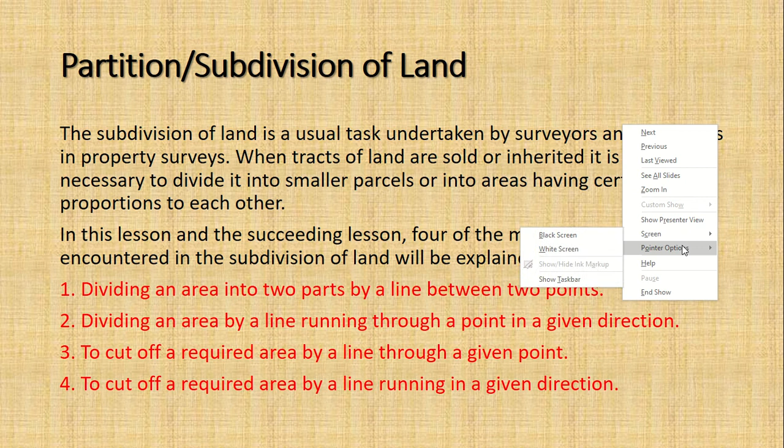So in this lesson, four of the most common cases encountered in subdivision of land will be explained. These are dividing an area into two parts by a line between two points. Kumbaga, meron siyang ituturo na point to point, and yun yung hatian. Usually, mas madali yan, ituturo na lang nila kung saan hahatiin, tsaka doon na natin i-run yung survey, makukuha na natin yung mga bearings and length ng dividing line.

Number 2, dividing ang area by a line running through a point in a given direction. Hindi natin alam kung saan point siya tatama. To cut off a required area by a line through a given point. Meron siyang gustong, kumbaga magbebenta ka ng 1 hektarya, cut off mo yung 1 hektarya from the 10 hectares. Saan yan? Mag-uumpisa sa isang point, given point. Saan yung direction ng line?

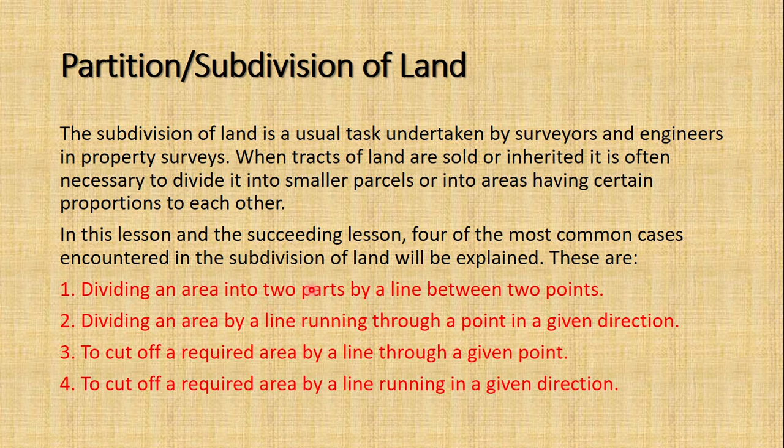Another one is to cut off a required area by a line running in a given direction. So yan yung mga common cases, pero marami pang ibang cases paano mag-subdivide. Meron yung paliko, hindi lang isang linya yung dividing line, kundi merong dalawa, merong tatlo, for example. So those are just cases.

So example, dividing a tract into two parts by a line between 2 points. For example, with 2 points, ito yung C and E, ito yung dividing line. Kanyari, ibebenta itong part na to o yung part na yan. So nandito yung mga adjusted latitude and departure. Of course, before you divide a land, given na itong mga adjusted latitude and departures na bawat line, from previous survey.

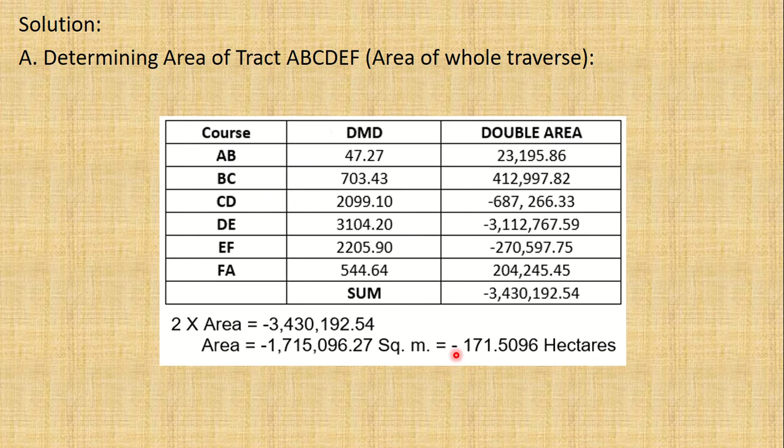So determine the area of tract A, B, C, D, E, F. Na-determine na natin itong area previously by DMD, DPD, and by coordinates also. Tingnan natin, ito yung buong area. Considering tract C, D, E, F, or east of the dividing line, balikan natin, C, D, E, F. So this is east of the dividing line, itong consider natin.

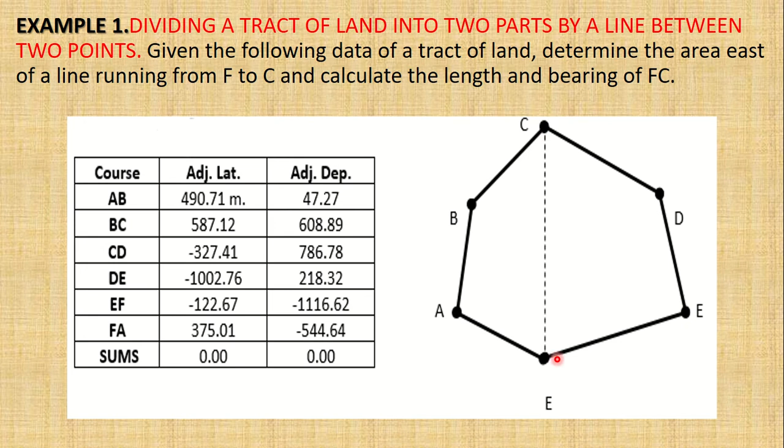So the sum of the latitude should be equal to 0 para mag-close yung line. Diba, so ito yung dividing line. 1452.84 meters ang latitude of line FC. Oh, nagkamali, F, this should be F, kasi meron na tayong E, so this is CF or FC. Ito yung kinukuha natin ang bearing or length. So this is the latitude of the dividing line and departure of the dividing line.

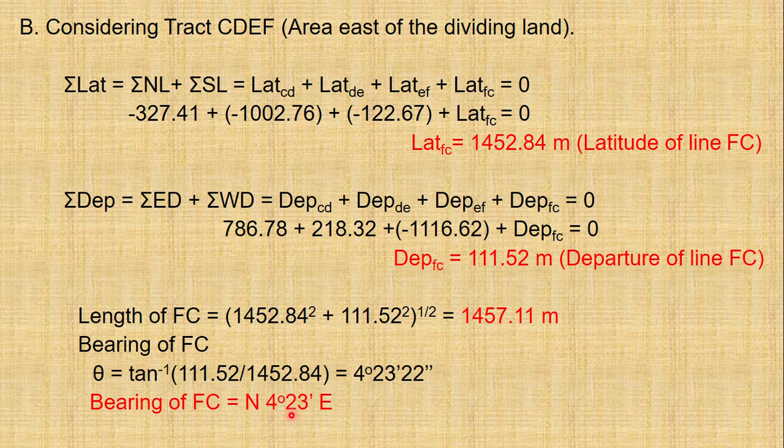So parehas din, kung makikita nyo, parehas din. Ito yung application ng omitted measurements, parehas din yung na-discuss natin previously from omitted measurements. So length of FC is just square root, raised to 1/2, square root of the sum of the squares of the latitude and departure of the line, which is 1457.11 meters. Now bearing of FC is... so this is the bearing now, North 4 degrees 23 minutes east. So that is the bearing of the line.

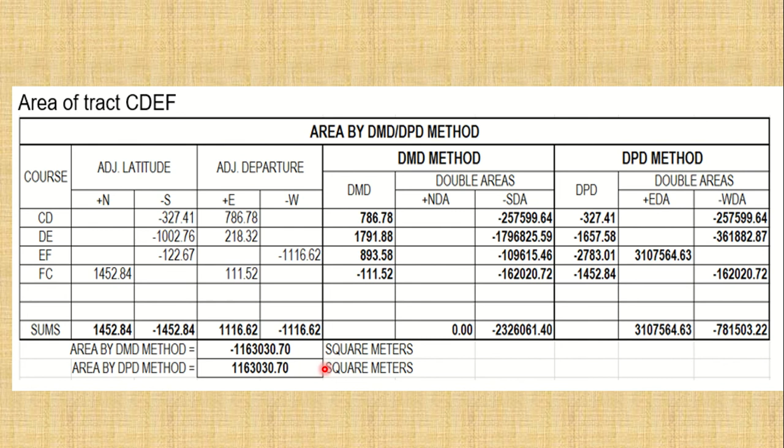So kunin na natin yung area by DMD or DPD method, applying the formula from the area computations that we have discussed. Yung rules ng DMD and DPD, nakukuha natin yung area which is 1,163,030.70 square meters. Yan yung area nun.

So example number 2 is dividing a tract of land by a line running through a given point in a given direction. Find the area of tract A, B, C, D, P of the two parts into which tract is divided by a line through A. Manggagaling sa point A, ito yung point A, medyo maliit na nga lang. Saan kaya siya pupunta? Tingnan natin, hindi pa natin alam kung saan yung direction.

Given yung direction, ang bearing niya is N75 30 degree east. Ito yan ang bearing niya. So dito, from the north, papunta rito, meron given na yung kaniyang bearing. So wala na tayong masyadong problema dyan.

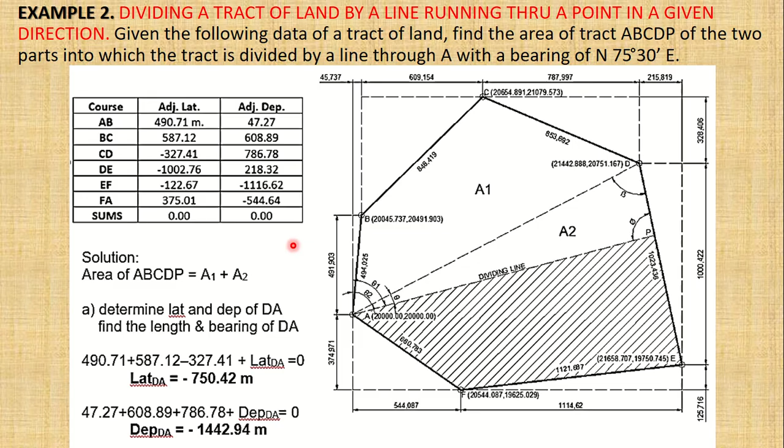Okay, so determine A1. Ano yung A1? Teka, balikan natin, A1, ito, area 1. So area 1, para i-add natin sa area 2, okay? Ito, area 2.

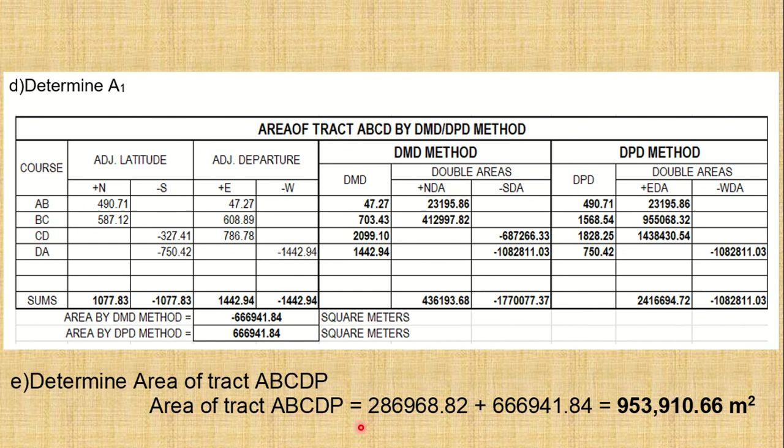So i-add natin area 1. Area 1 plus area 2 is equal to 953,910.66 square meters. Yun yung tract ABCDP, which is the unknown. Okay, so nasolve na natin yung problem.

So another one is cutting off a required area by line through a given point. So to cut off a required area, a line given point, a tract of land with adjusted latitudes. Take note, isa lang yung ginagamit nating land.

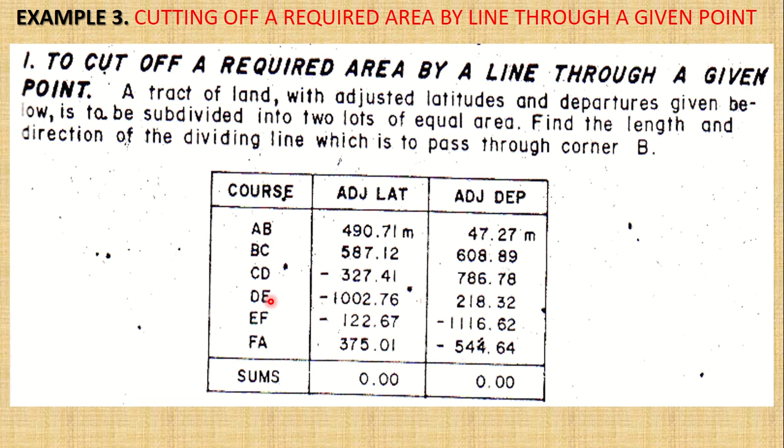So with adjusted latitude and departures given below, is to be subdivided into two lots of equal area. So equal area na tayo nga. Find the length and direction of dividing line which is to pass through corner B. Okay, at corner B, tingnan natin, corner B, yan.

So again, magkakaroon tayo ng trial line. Ilan ba yung area nito? Ito yan. Siyempre, obviously, hindi magiging equal to 1/2 of the area, okay, makita natin yan, di ba? Pero at least meron tayong idea kung ilan pa yung kulang para i-adjust natin itong dividing line dito.

Okay, so area or the total area of this parcel of land is 171... So na-compute na natin ito, or 1,715,096.27 square meters ang area. Okay, so kunin natin yung kalahati.

So area BCDP plus area PEFAB is equal to ABCDEF. Okay, so yan yung basehan natin. So, BCD plus...

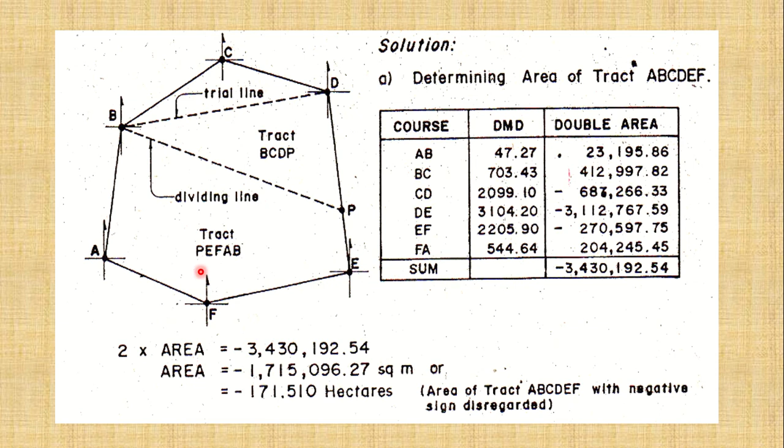BCDP plus PEFAB, itong dalawang linya, dalawang area na to, should be equal to the total area. Okay? So ang area na kailangan natin ay...

857,548.14 square meters. So determine the length and direction of trial line. So trial line tayo.

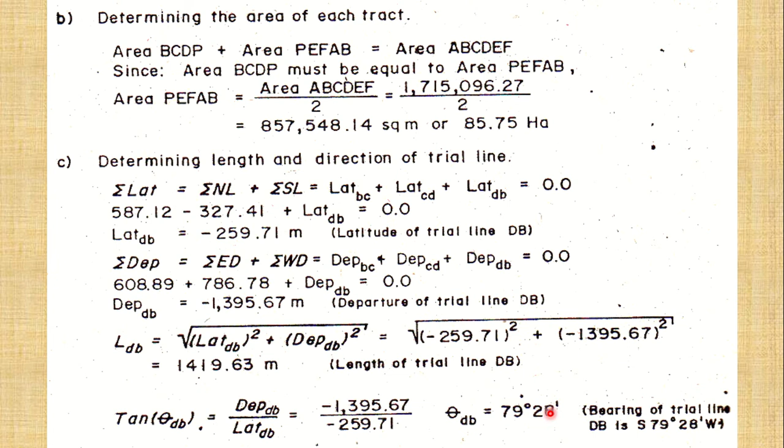So sum of the latitude should be 0, sum of the departure should be 0. Okay, so makita natin departure and latitude ng trial line. Ayan, nakuha na natin. Then makuha natin yung length ng trial line, at saka yung kanyang bearing. Okay, so...

Area of the tract included in the trial line. So ito yung BCD, Triangle BCD. Tama ba? So ang area ay 330,645.47 square meter ang area ng ito using the DMD.

Okay, so kulang kasi 85 hectares yan, 33 lang ito. So kulang to, so i-adjust natin yung dividing line para makuha yung kulang. So area of BDP, ito pa yung kulang, i-adjust natin. So should be 52.69 hectares pa, okay?

Now, so makukuha natin yung ito, yung bearing nito. DP. So this one is the bearing. Kukunin natin yung bearing niya. Tapos, yung length also of DP.

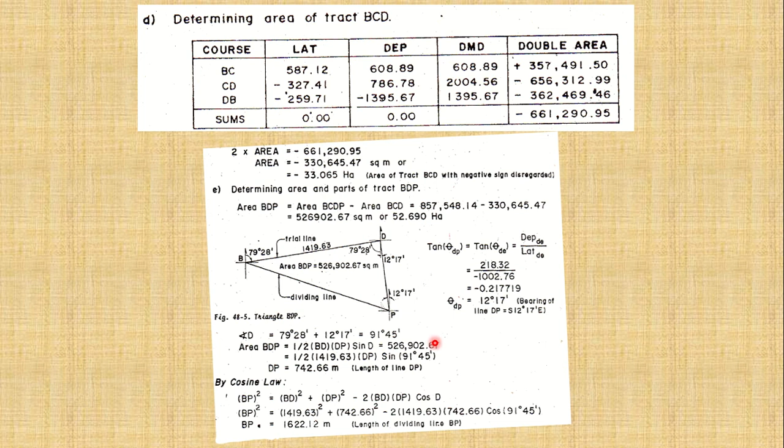Okay, so para ma-verify natin, i-check natin. Dapat 180 ang total interior angles.

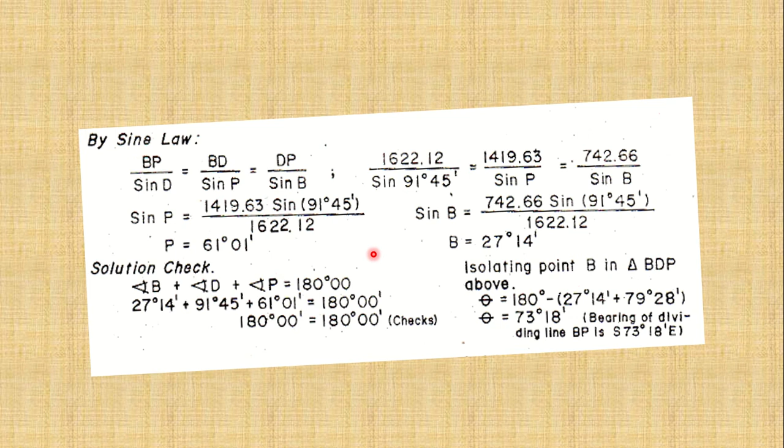Okay, divide by 2 ulit natin. East-west direction. Okay, so baka nandito naman siya, no? So first, we need to make a trial line. Ito yon, trial line natin to. So again, i-compute natin yung latitude at departure para makita natin yung length nito. But alam natin na east-west direction nga ito.

Kaya alam na natin yung kanyang bearing. Due west or due east, depende kung saan ang reference natin. Pag nandito tayo, due east tayo.

At kukunin natin yung length na yan, para makuha natin itong area kung ilan ba, ilan pa yung kulang. So makukuha natin itong para masolve natin yung D na ito, yung distance na yan, para ma-locate natin itong line na yan, yung dividing line. So divided by 2, ito yung dapat nating makuhang area.

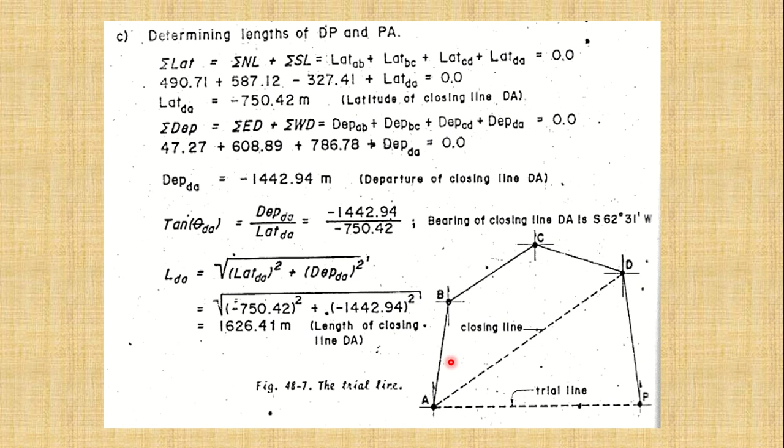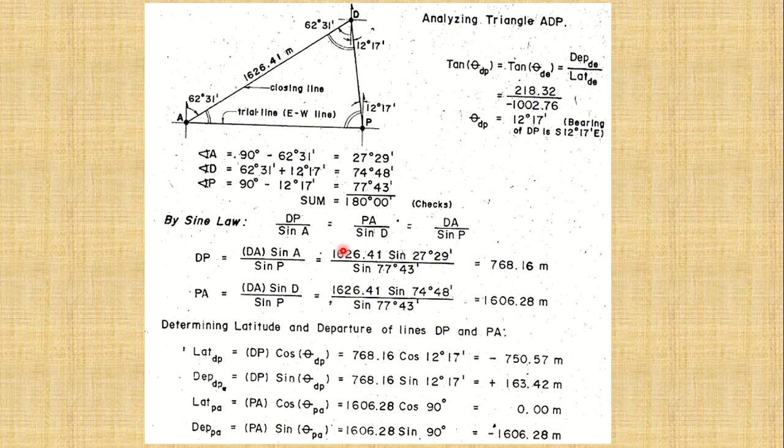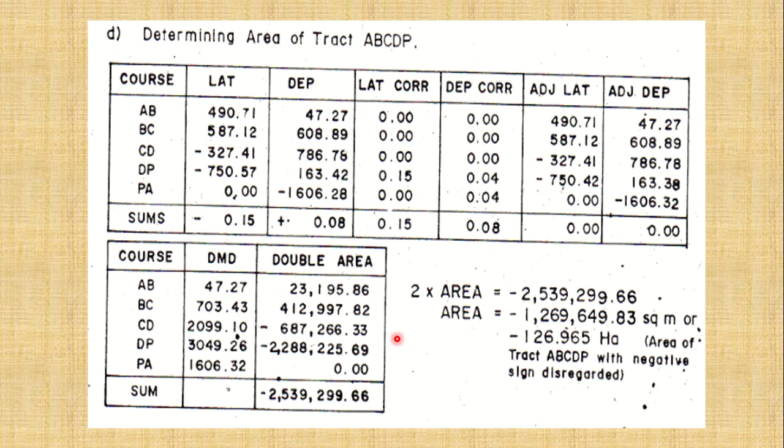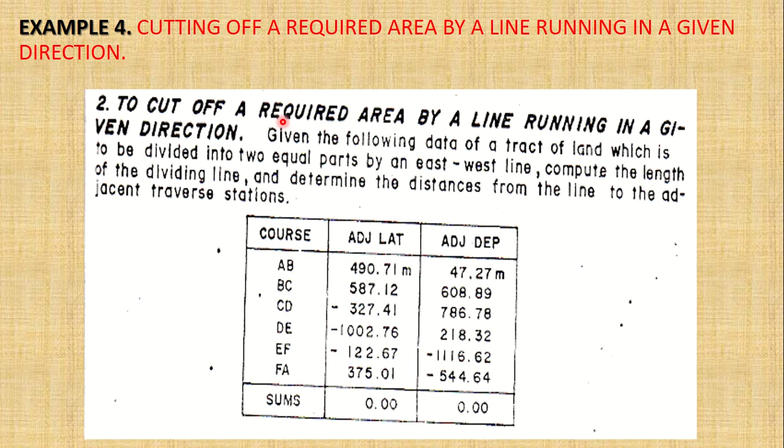So tingnan natin: ABCDP minus MBCDN is equal to AMNP. Okay, AMNP. So ito yung area nito, dapat 412,101.43 square meters. Okay, so tingnan natin.

So in short, AMNP, area ARQP minus area ARM minus area PQN. So dapat pala naglagay tayo dito ng illustration. Ito. I-subtract natin ito.

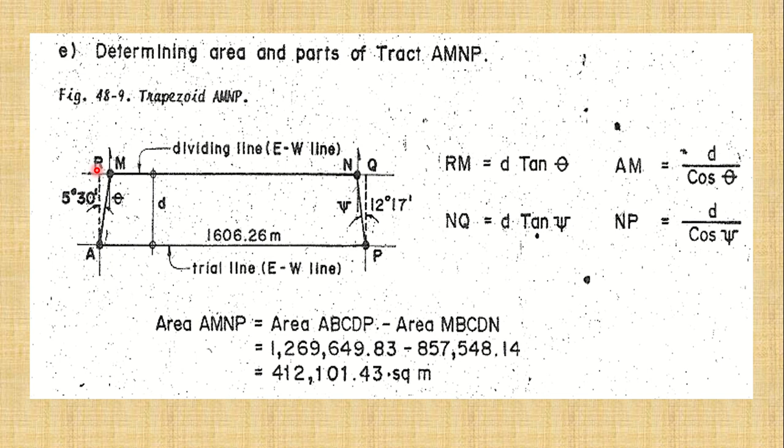ARQP is this one, gawin nating rectangle muna, no? ARQP, diba? Tapos i-subtract natin yung area ng dalawang triangle na maliit sa gilid. Ayan, so ito yung AMNP, area niya.

And then kuha din natin to, times D. Ayan. Tapos in terms of D, makuha din natin yung ARM. Okay, plus this area. And then, in terms of D na yung ating equation, makukuha natin yung value ng D. Okay, using quadratic formula or by just using your scientific calculator, shift and then solve, makukuha natin yung D.

So we have two values, 9775.78 and 263.47, and they are both positive, no? So therefore, you need to determine which is which.

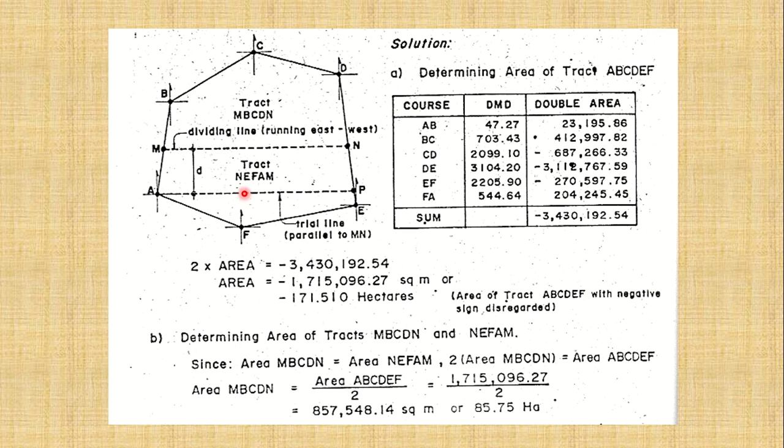So pag ito lumampas, no? Tingnan natin yung figure, okay, gaano ba kataas ito? Baka lumampas na siya. Okay, lumampas na siya doon, so hindi yan yung sagot. Okay, ibig sabihin ito yung answer.

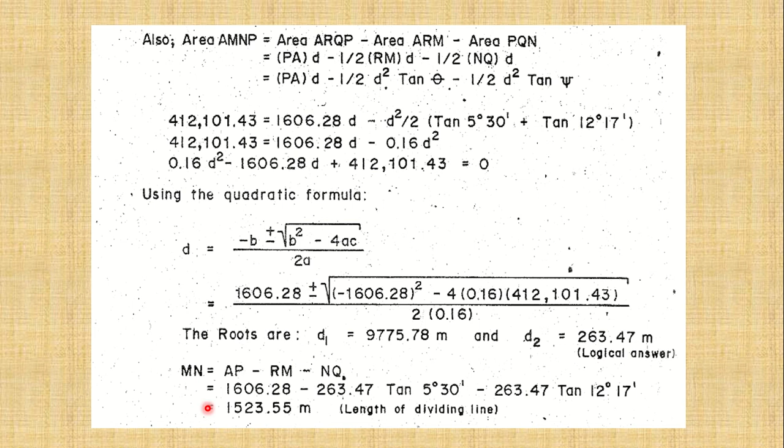Okay, ito yung value ng D, 263.47, which will give you the length of the dividing line, MN, 1523.55. Okay, and also the problem is asking us to determine the distance of points M and N from adjacent stations.